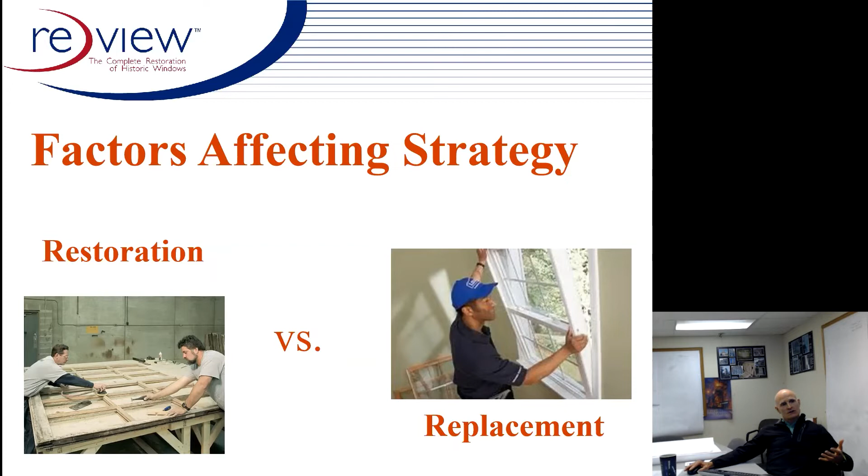All right, on the restore versus replace, some of the factors that would affect your strategy of restoring the existing windows versus replacing them with a new unit.

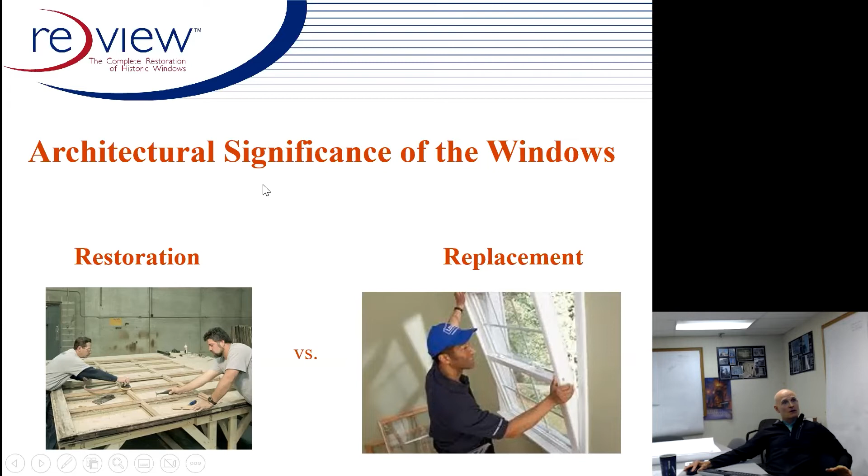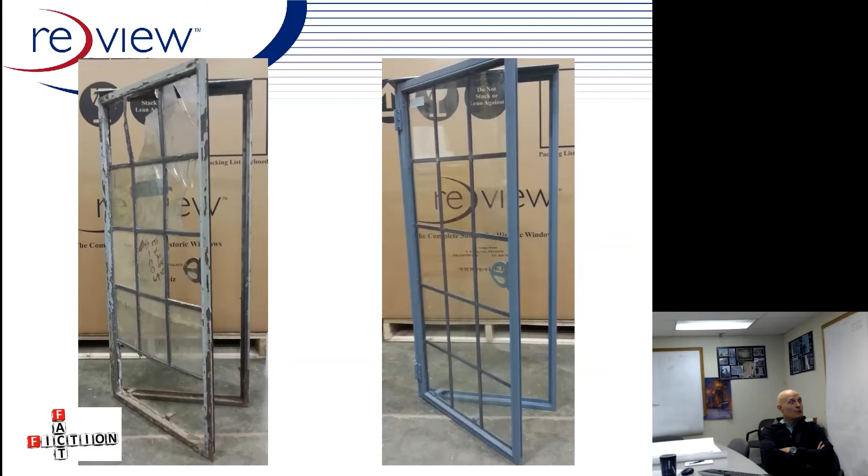Here's a version of a steel window restoration. These steel windows came out of the alumni hall at Vanderbilt University, and the one on the left, that's a typical condition. So we made repairs to the caning on the glass, and we then removed all of the existing finishes, made repairs to the rusted steel. We had to maybe weld some sections or used special restoration epoxies to fill pits in the steel, and then powder coated all the steel surfaces, reglazed, and then reinstalled into the building.

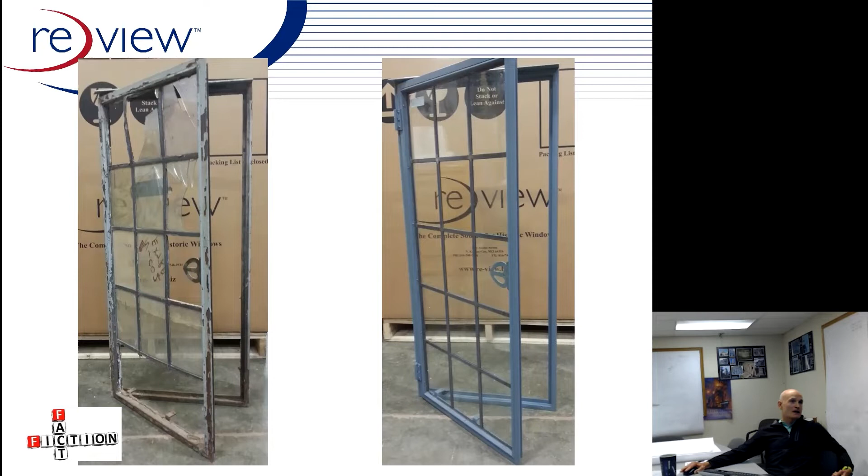So you've got a 100-plus-year-old steel window on the left. It looks like garbage, but with a little love and some technical know-how, you can make it new again on the right.

The window manufacturers will promote a lot of confusing messages. Just the other day, I saw a Facebook ad by one of the major window manufacturers that said that their glass is 83% more energy efficient than single pane. And if you look at the double asterisks on that statement at the base of the ad, you find out that they're referencing a metric called solar heat gain coefficient, which is not something that people spend much time thinking about.

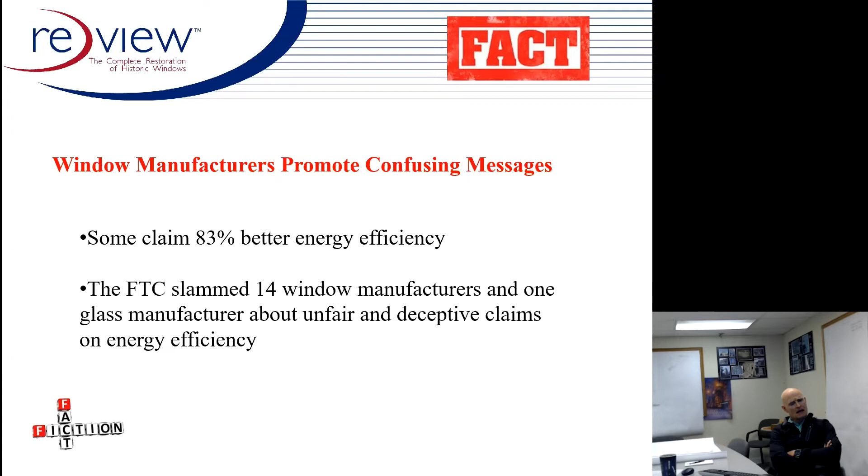So they make it sound like your old window is not going to be as energy efficient, and many of these manufacturers have been slammed by the FTC because of misleading information like that. Because it's understood from these ads that you could save 50% on your energy bills by replacing your windows, and it's closer to maybe 10%, depending on the condition of your existing system.

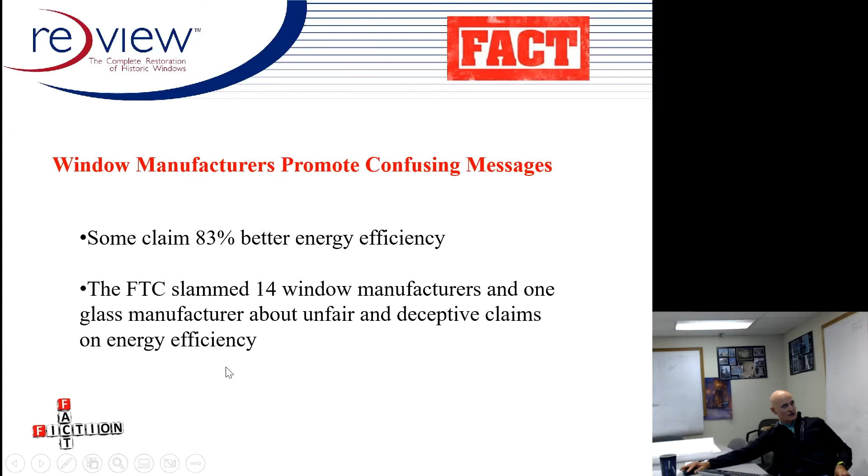We have done a lot of window testing, where we will do a restoration of an existing wood or steel window, and then we'll subject it to air and water testing, and also test it for the U value and solar heat gain, because on some of the large projects that we work on, the energy performance of a restored window is very important. And what we determined is we can make an old wood window or steel window function very similar to a replacement window. On air infiltration, we can actually make them more airtight than the replacement windows.

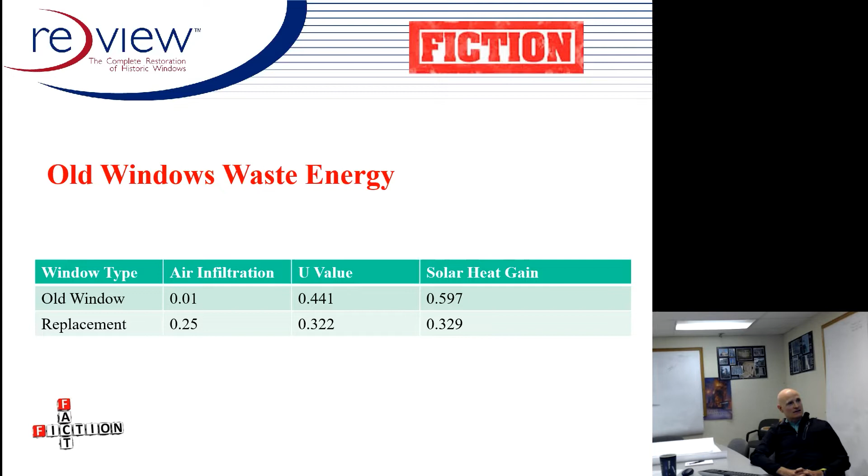On the U value, the replacement, if it has low E glass and argon filled glass, may perform slightly better than a single pane with a storm window. And it might be a little bit better with the solar heat gain coefficient. But the old, restored window is very, very close to one of the modern energy efficient systems of today.

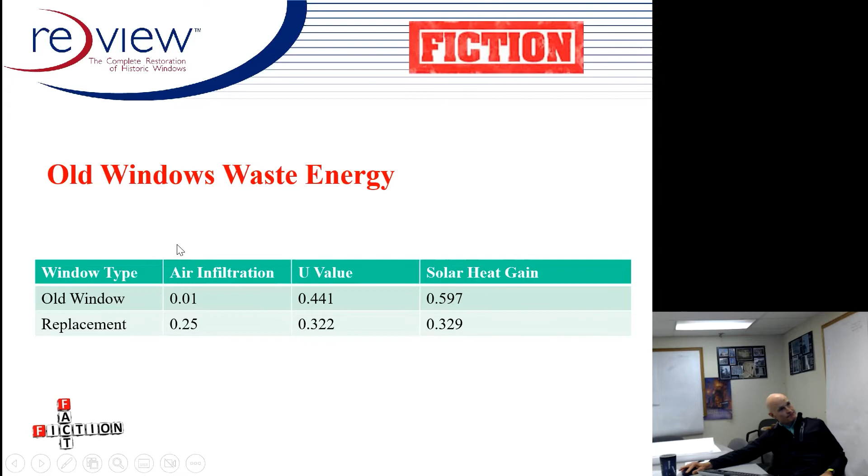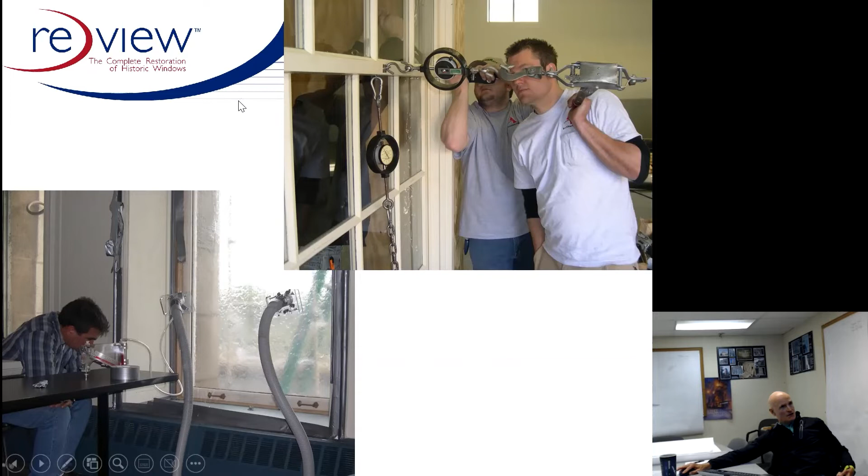We've even done tests shooting 2x4s at historic windows to see whether they meet Florida's standards for hurricanes. We have done ballistic tests on our windows too, for security areas of state capitals we've done work on.

And what your new wood window manufacturers will do is apply chemicals to prevent wood rot, or to reduce the effects of wood rot. The old growth wood already behaves that way. It doesn't rot. We've had old wood windows that we've restored that haven't been painted in 40 years, and the wood is still very intact and restorable.

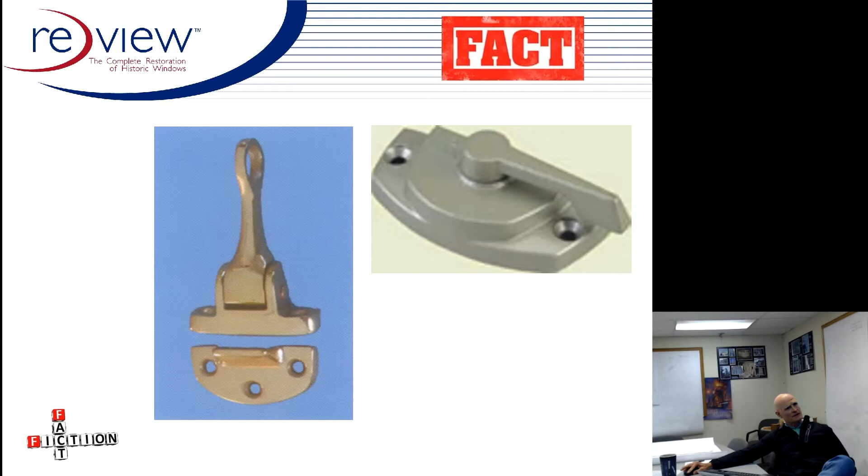The balance system that balances the sash: we work with double hung windows quite often. I would say that's probably the most prominent design of historic windows that we see. And the sash on a historic wood double hung is balanced by a counterweight and pulleys, and the pulleys are typically brass, and the counterweights are attached by either a chain or a rope. The rope will last about 50 to 75 years before it needs to be replaced. And the system will work for hundreds of years if it's maintained.

On the converse, your replacement windows will have what they call a block and tackle system. That is, it's a spring balanced system that has a very minor cord, a nylon cord that attaches to the sash, and the spring will lose its tension, and the cord will break very easily. It's probably the most repaired item on a replacement window that you'll find. So the difference in the operation of the windows is huge on a historic window versus a replacement window.

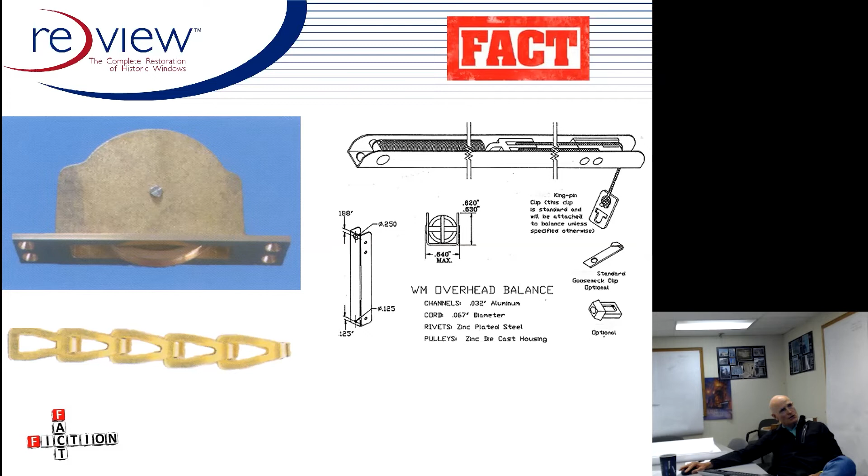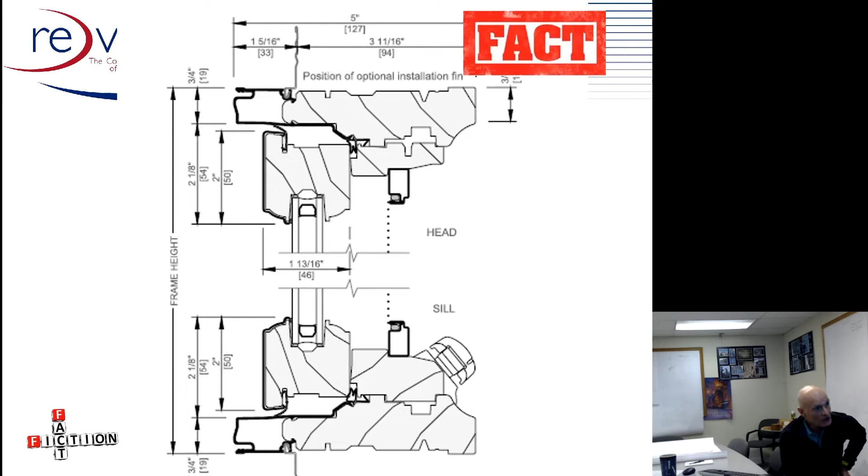Here's a cross section of a replacement window, and one of the problems that the replacement guys have is to protect the wood, because this new growth wood rots, and so most of the wood window manufacturers will put aluminum or vinyl around the exterior components of the frame and the sash. And you see on this detail, there's aluminum on the exterior portions. That's all good. The aluminum doesn't need to be painted as much as, let's say, a wood surface.

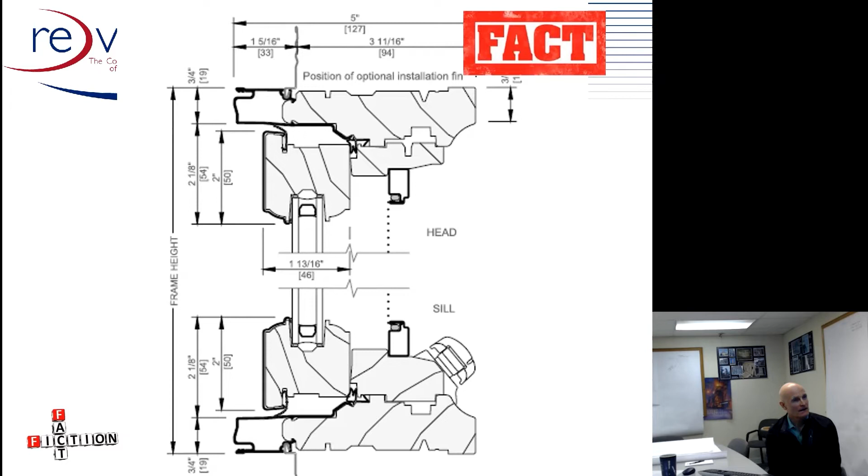But if you look at this detail, yeah, and I think I've got another. Oh, I didn't. Let's see. Well, I just messed up.

But on that detail, the water can get behind the cladding, and that's after about 10 years. If you don't seal up that cladding, you'll have water migrate behind it, and you will have some wood rot resulting.

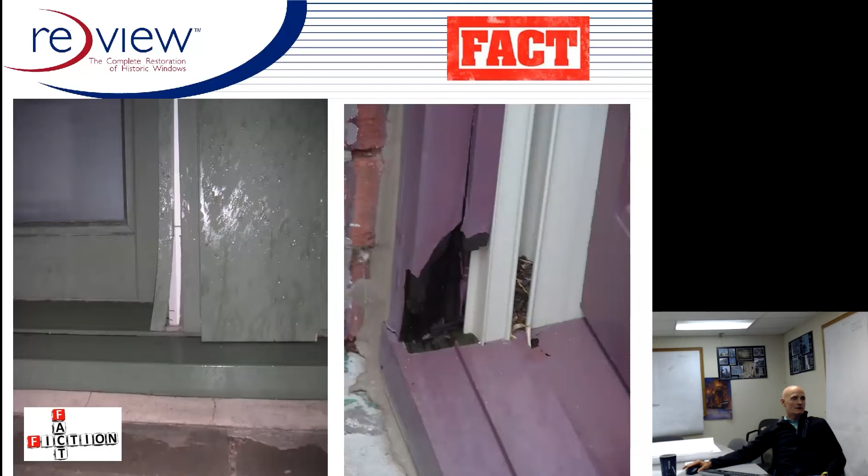Here are some pictures of some replacement windows. One is 3 years old. The green window on the left is a train station in Salt Lake where the wood is starting to separate. On the right is a wood window replacement. You can see the plastic jamb liner, and the brick mold in the frame is just rotting out from the inside out, and it's only 8 years old. So these are the realities of replacement windows.

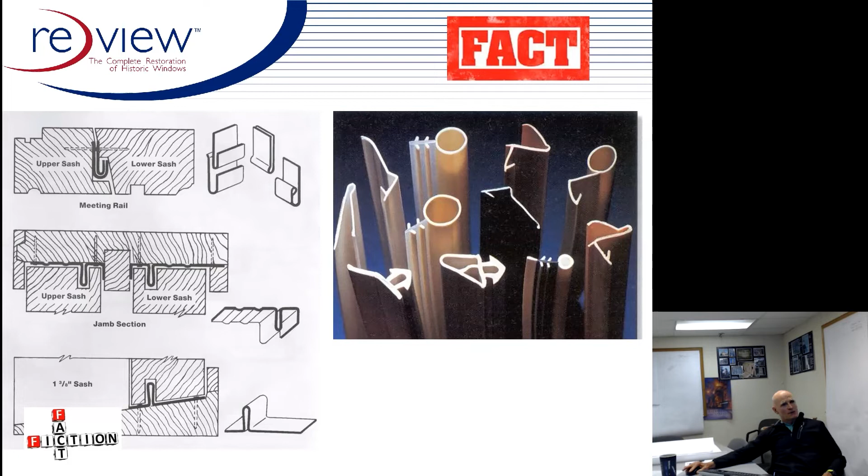As opposed to your more modern weather strippings, which tend to be silicone based or plastic based, which will lose their tensile strength and begin to malfunction over a period of 10 to 20 years.

And I don't want to sound like I'm picky, but I think that you owe it to the building to respect its presence and its architectural integrity.

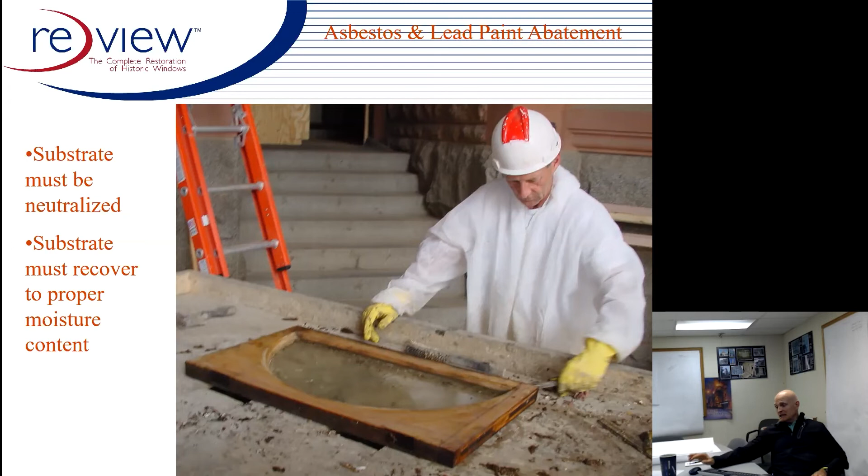Number one is we're dealing with old windows that have lead paint, and sometimes there is asbestos in the glazing compound, and the industry is much more adept at dealing with hazardous materials than it was 20, 30 years ago. And people have training and equipment to negotiate hazmat. But you want to be prepared for that. And one of the things that we make a big effort to do is when we are removing existing finishes, the wood needs to be fully neutralized before we apply new finishes. And we have seen in the past where people have forgotten to do that.

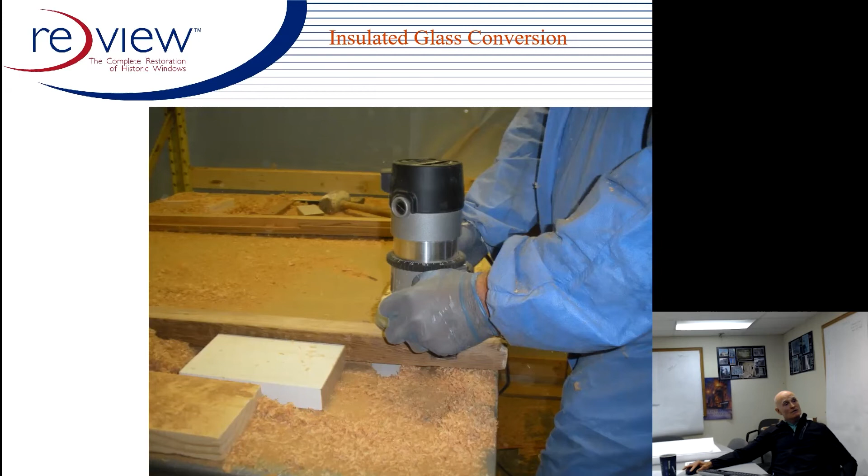This is an interesting technique that we have incorporated with our window restoration. We can take a historic wood window and route out the sash so that it can accommodate an insulated glass if that is desired. Most of the historic windows have 1/8 to 1/4 inch plate glass, and we can insert a 1/2 inch insulated glass, and we can then convert an old historic window into an energy performing match to a replacement.

When we do the restoration on historic wood windows, we spend a lot of time removing old punky wood and then applying epoxy. And I would say most of our wood window restoration involves a two-part epoxy. One is a liquid epoxy that will penetrate the wood fibers and harden the wood, and it will eliminate any further deterioration of the wood.

Then, like you see here, where we have removed a lot of wood filings, we will use another epoxy filler. It's like a wood filler, but it's made of two-part epoxy that will fill cracks and gouges and areas of the wood that are missing. So the epoxy work can do wonders for bringing an old wood system back to life.

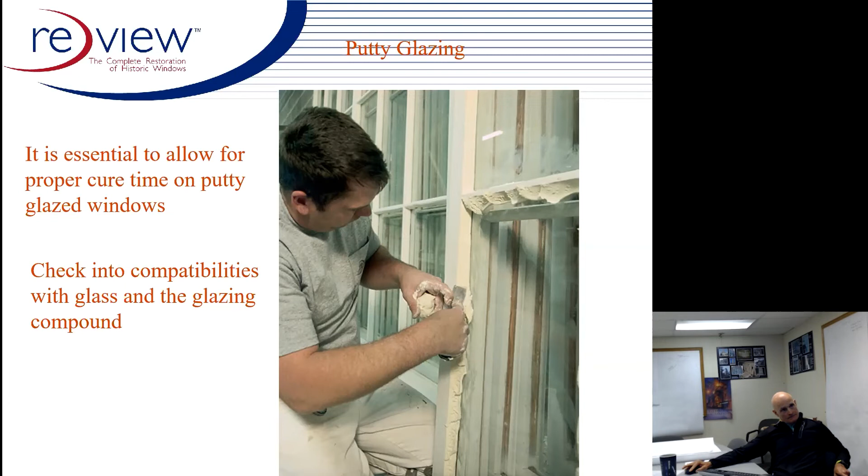So if you use wood stops, in fact, if you're using nails or screws on any exterior surface of windows whatsoever, they should be stainless, and never use a ferrous nail or screw on an exterior application whatsoever.

We do a lot of our own painting, so that we can apply preservative treatments in our plant. We make sure that the primer and the finish paint are from the same manufacturer, and that we involve the paint manufacturers and have them come to our plant or come to a project site to review our application of the paints, so that they will sign off that the paint is adhering properly and that we've got the right mil thickness, and it's a good common sense way to make sure that your finishes are going to benefit you in the long term.

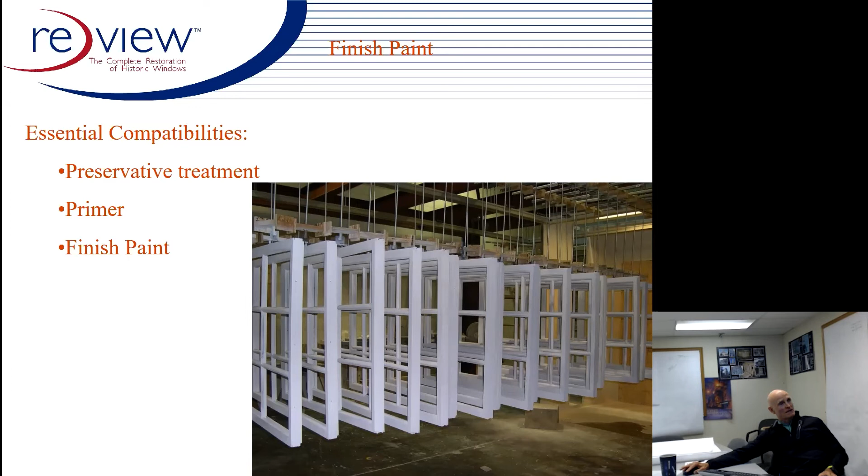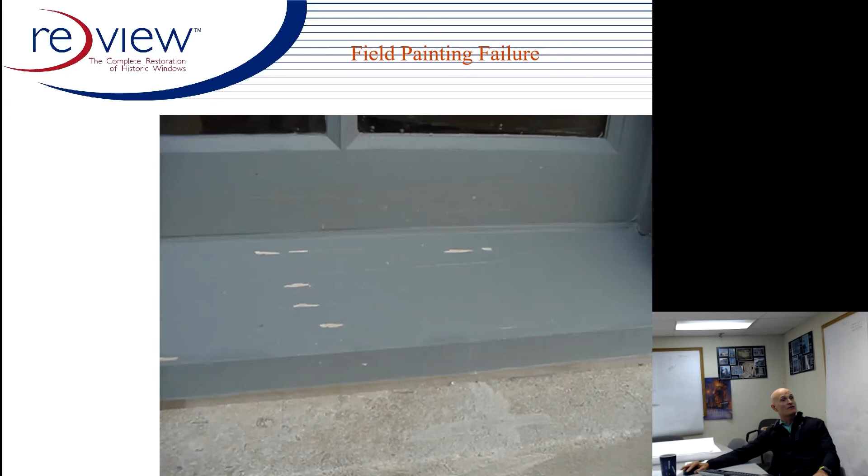Here's an example of a sill that had a primer that failed, and it's only a couple of years old, and you don't want to have to refinish your windows. You want to do it right to begin with, and involving the paint manufacturer up front is a good way to do that.

Adhesion tests I mentioned before. If you've got a big project, Sherwin-Williams or Benjamin Moore will come out to a project site and conduct an adhesion test to make sure that everything has been done properly.

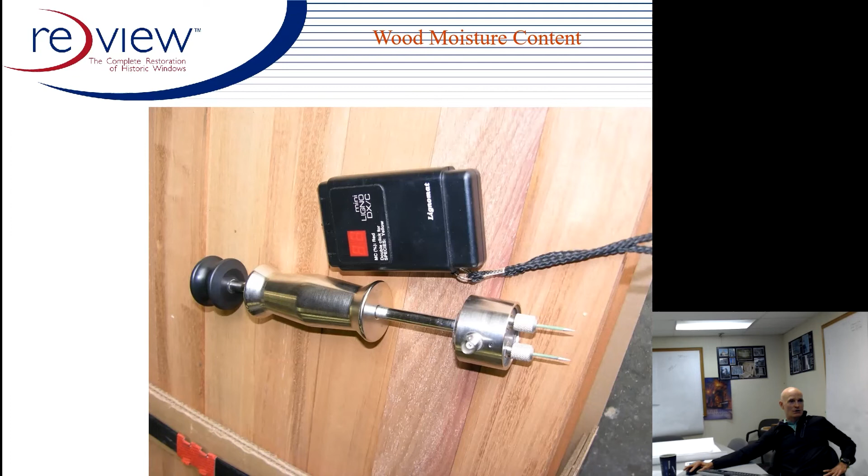What type of wood you use when you're doing restoration work, if you're replacing sills, or you've got components that need to be replaced, like brick mold, or if you've got an old sash that couldn't be restored and you need to manufacture a new one, it helps to use the right type of wood that matches, but also one that is going to perform over time. I'm not a big fan of new growth pine, but we've had a lot of success with mahogany and sapele mahogany, African mahogany. We've used Spanish cedar, cypress, Douglas fir.

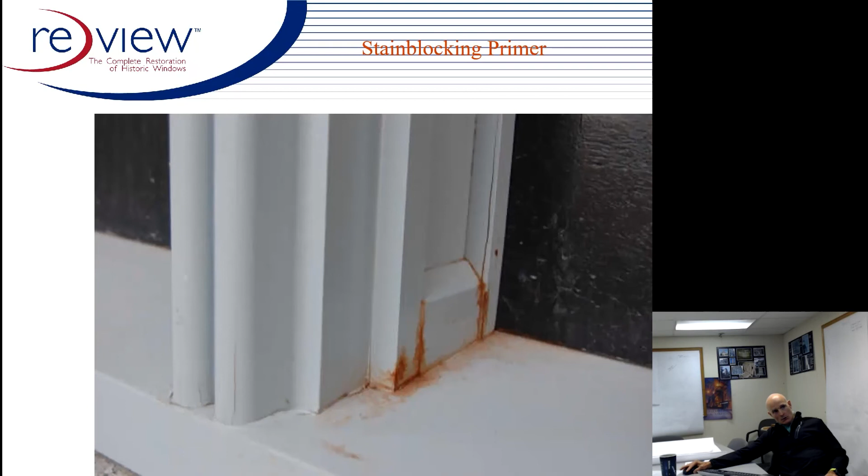And I just bring that to the forefront so that if you are using mahogany on an exterior application, make sure that every surface has been treated with a stain blocking primer. On finishes, it really helps to use the best that you can find.

This was a school that we did in Buffalo, New York, and the documents called for Sherwin-Williams base A100 finish, which is one of their old finishes that I think they still make, and it's a very low price point. They've got so many better finishes out there today, and you can see on the horizontal surfaces where the finishes have peeled off, and this was probably taken in about 8 years, which is, it shouldn't look like this.

So if you're using Benjamin Moore or Sherwin-Williams, use their best finishes. It may cost 2 to 3 times more, but they're very, very much worth it. If you have someone fabricate some historic windows and do custom fabrication, make sure that they use the same joinery that the original windows used.

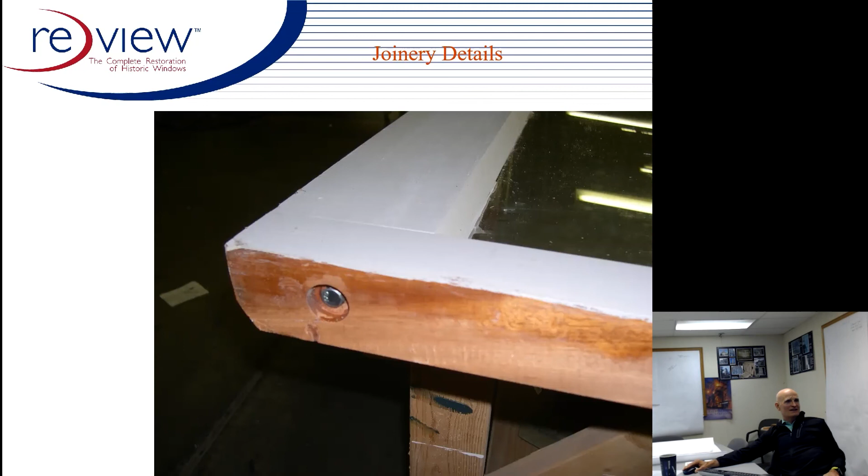This was a job that we ran into where the replica window was built like a wood cabinet door that you'd find in a kitchen, and was bolted with a lag bolt rather than a mortise and tenon joint that the originals had. And what you're looking at here won't last like the original. You might get 30 years out of this rather than 150 years. It's a big difference. So the original joinery is the best way to go with mortise and tenon joints.

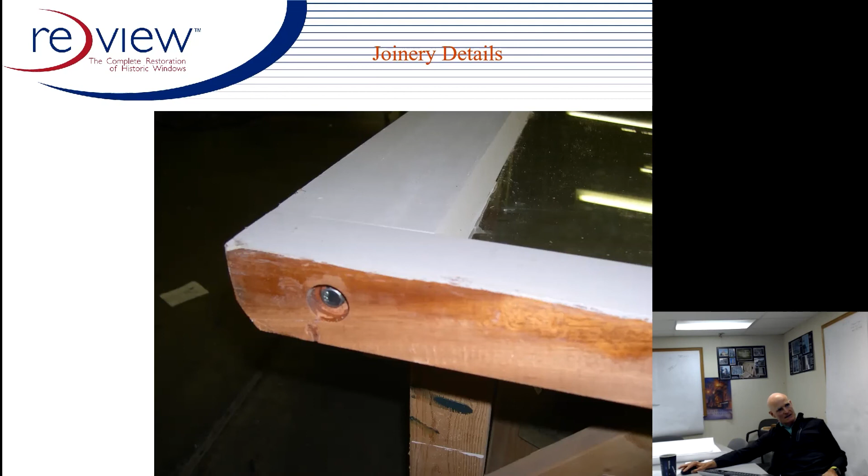And if you've selected your finishes and you're going to use things like putty, just make sure that they all will work together, because you can get yourself in trouble by introducing a putty or a caulking that may have a negative reaction to the finishes that you're using. And just double check with the paint manufacturer prior to selecting all of those components.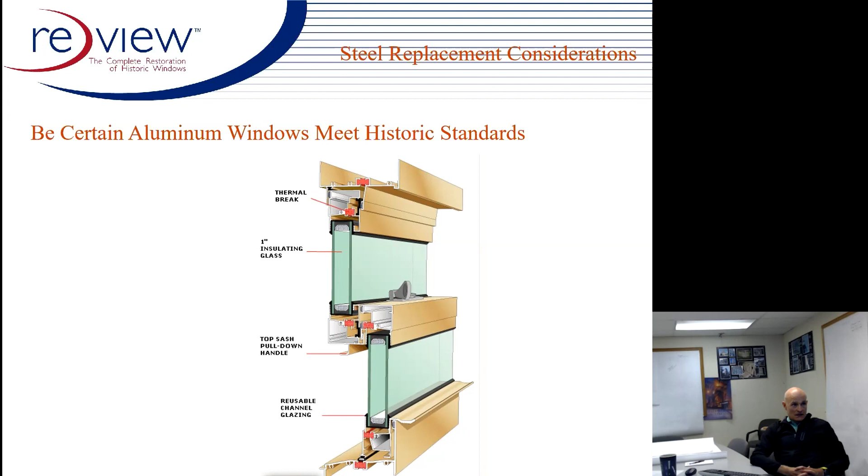So if you go the replacement route, what you want to make sure is that those dimensions are as close as possible. And then the other thing would be the glass. You want to make sure that its reflectivity is very comparable to the single pane glass that was in the system. So, and that, folks, is the end of the presentation.

I think I ran a little over, did I not? Oh, you're fine, Brooks. This was a really, really good comprehensive presentation. Like you and Kelly and I had discussed earlier, windows come up in almost daily life, both within the preservation realm as well as Main Street. So this was great. This was great stuff.

I've got quite a few questions in the Q&A box, so I'll just kind of go through those one at a time. First question, how can we convince contractors to do this type of work? More often than not, they say it's not possible to do this type of work because they do not know how to.

Yeah, that is one of the big challenges with restoration, is to find somebody that can do it. And I would use the internet to begin with, to see if you can find somebody. There's an alliance called the Window Preservation Alliance. It has probably about 200 members, and you might be able to find someone there.

And then even what I would do too is that if you can't find anybody, you're looking for somebody that has a craftsman that's been in the business for 30 plus years, will know how to deal with historic windows, because they know woodworking, they know finishing, they know glazing, and they know how these windows are built. So you may just ask around for somebody that has a lot of craftsmanship and background in the trades, that may not represent themselves as a window restoration contractor, but knows how to do it.